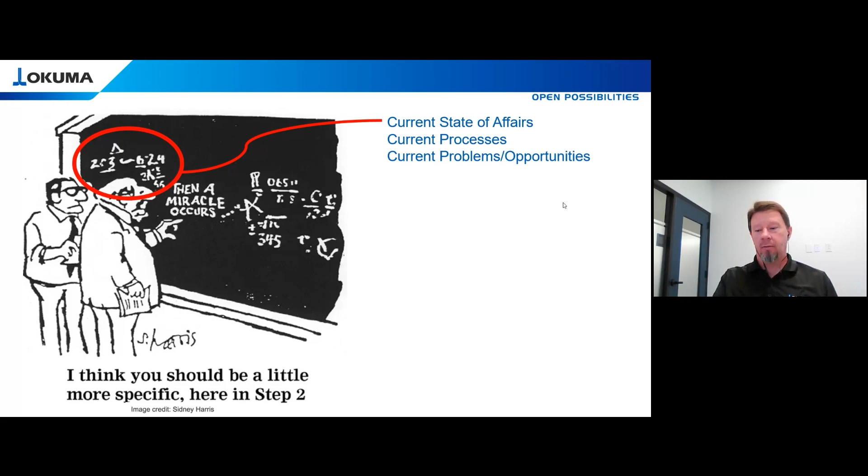You know, you've got the current position. You've got two guys sitting here at a board looking at a plan, looking at an equation, and you've got your current state of affairs. You've got where you currently are, what your current processes are, the problems, the opportunities, the things that you know currently. Then you have where you want to go. You've got your desired outcomes and where you want to take the company. And then you have that little middle piece, which is just, you need a miracle to happen. You need something to happen here in the center.

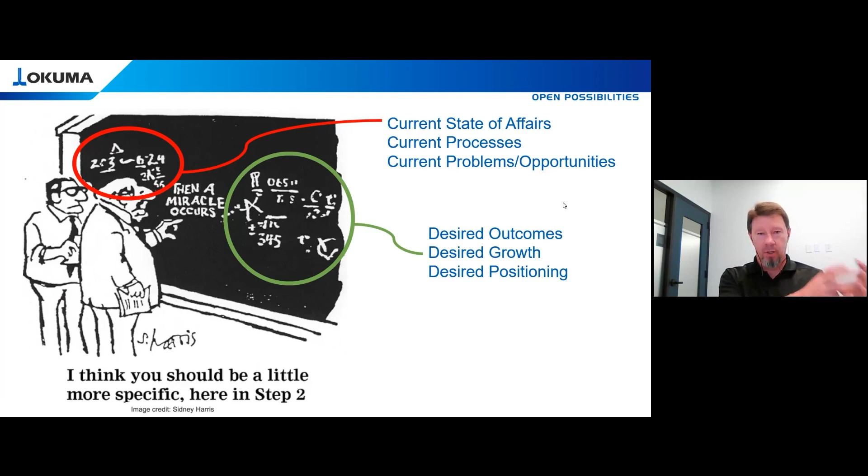So some of what I'm going to talk through today is really part of that middle piece. How do we help companies go from where they currently are, their current state of affairs, to where they want to go, dealing with some of the problems that they deal with on a day-to-day basis.

So two things that I know all companies have in common. I have the great fortune of working with companies globally, across the globe, and there's two threads that I always find in every conversation that everybody deals with. The first one is the actual product that companies sell. Every machine shop, you know, one shop might be an aerospace company cutting Inconel and titanium and hardened machine alloys. Another company's in medical and they're doing a different type of material. Then you get people that are into aluminum and structural and automotive, and everybody has their own niche in the marketplace. But the one thing that they're all actually selling is time. So time is what your product is, and the people who get the most out of their time wins in the end.

So the first thing is time. The second thing is challenges, right? Problems or opportunities. If you're a pragmatic person, a lot of the time you look at things in terms of problems that you're trying to solve.

You know, the real cheerful personality types talk about it in terms of opportunities. But at the end of the day, there's challenges you have to get through to move to that next step, to elevate your company to where you're trying to go. You've got that challenge you've got to overcome.

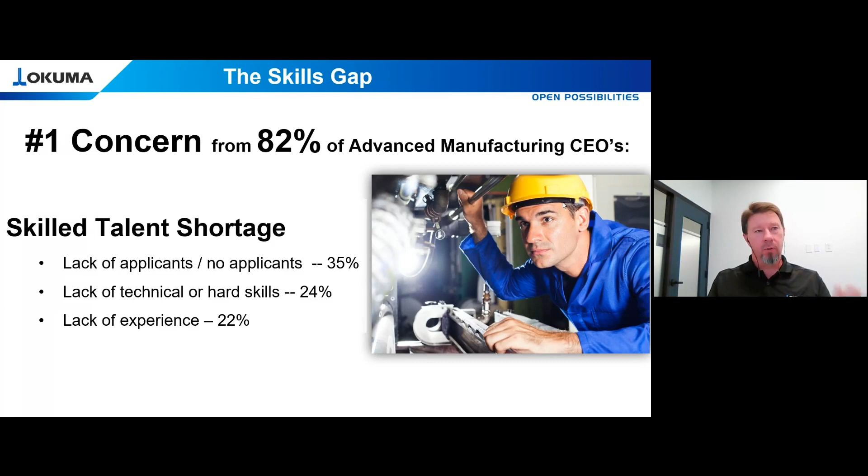So this entire workforce is aging, and we've got to build that bench strength of talent to backfill that. And then there's going to be menial tasks that people don't want to be involved in—that's an area where automation can really help bridge that gap.

When we look at automated cells, we've seen over and over where automation gives you the highest percentage of utilization, keeping that spindle running for more hours throughout the day.

Anybody out there that knows that machine knows it's very complex—basically 9 axes. It's like having 2 lathes with X, Y, and Z travel and a 5-axis mill all combined into one machine. It's a complicated machine.

They do small lot sizes, constant changeover, and yet when you look at that, it's the highest utilization in their shop. They're running 80% spindle utilization on that machine, and that is an automated cell.

That's a cell loaded with a robot system. It handles the changeover and things of that nature. And then as you start breaking down the rest of the shop, their numbers drop significantly.

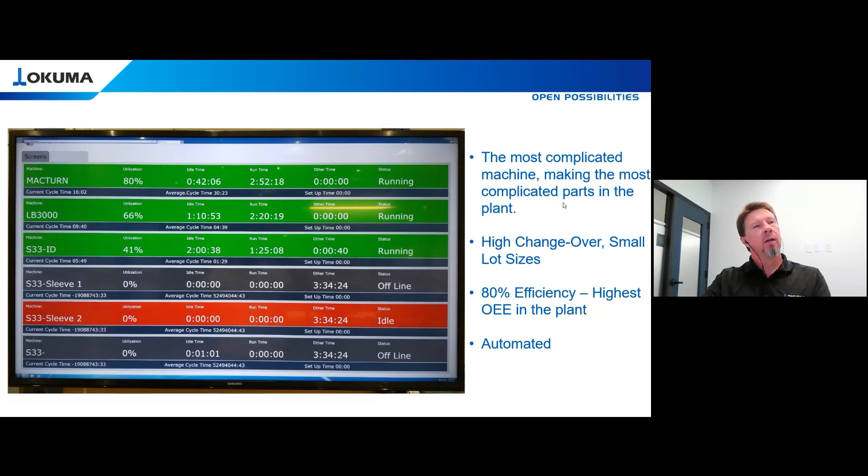This is a typical scenario we see over and over with machine shops—what they start with are manual operated cells. Even if they think they don't have the lot sizes to be able to automate, once they get into that arena, they realize their spindle utilization goes up dramatically.

Part of that is because when you look at some of these statistics, in a typical 8-hour shift, even if everything is running perfectly, on average 12% of an 8-hour shift that machine winds up sitting idle at some point.

So it's waiting on an operator—an operator's at break, or spread loading 3 or 4 machines, and he or she is in the middle of loading one machine when this one stops, and all of a sudden that stack light goes from green to yellow, and it's waiting on that operator. So having automation can help affect that dramatically right from the start.

Anytime you're trying to implement change or move in a different direction, you always get the yeah buts. Yeah, but I can't afford big systems like that. Yeah, but I don't have the manpower to do this type of work. I don't have the skill set to implement it. I don't have the budget to take on this type of automation.

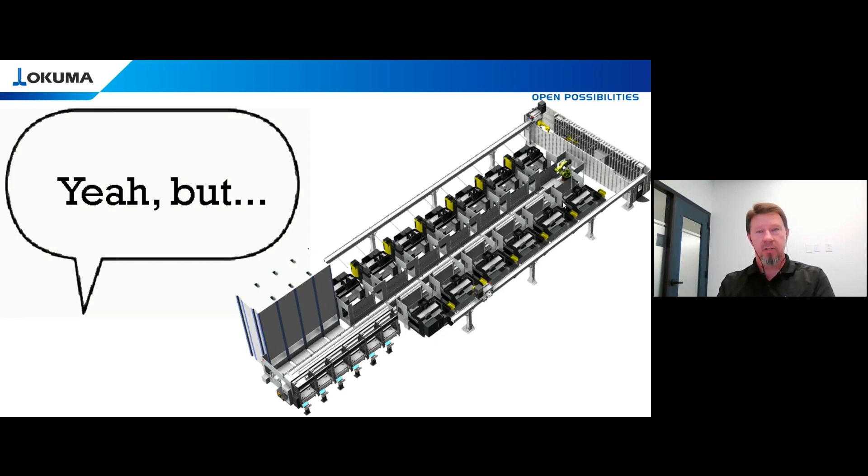The thing I want people to think about is that a lot of times when you think automation, a lot of the mindset in North America goes to these big integrated systems type cells. But we can help find a solution for the yeah buts by starting small. I'm a firm believer in anything you take on, you really need to do that crawl, walk, and run.

So many times we wind up with customers that have a project they want to automate, and instead of crawling and walking and then running, they want to go from zero to full out sprint. Then when they get the dollar amount or the complexity of a big cell, they lose interest in it. The fear sets in and they wind up walking away from it and going down the path they've always done, because change invites chaos. And it's something you have to be able to work your way through.

So starting small, starting with simple systems that are budget friendly, and then growing, helping a company fine tune their processes to be ready for bigger implementations, really is the right scenario.

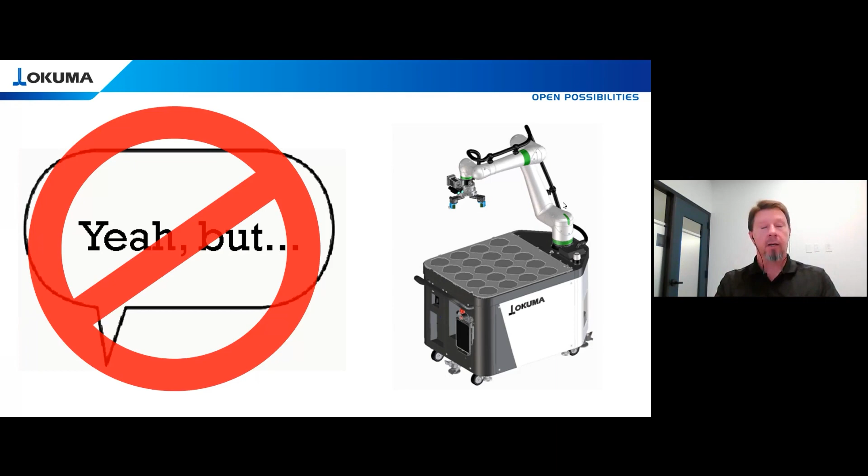So in today's presentation, I'm going to go through each segment of basically starting with something small, how that can be multiplied and then compounded into bigger, more complex systems. This is going to serve as the roadmap of some of the things I'll talk through today: the common types of machine tool tending, machine tool automation.

The first one that sometimes gets overlooked when we talk about automation is actual control. For us on the Okuma, we run an OSP control, our proprietary control. It doesn't matter what control system you're running, everybody's got their own different front end, but most controls on the background are either for us the OSP, or you've got a FANUC back end, or a Mitsubishi, or whatever. But you want to make sure you're working with a control that has the ability to have robust interfaces, and then system monitoring, which I'll talk more in depth about here in just a little bit.

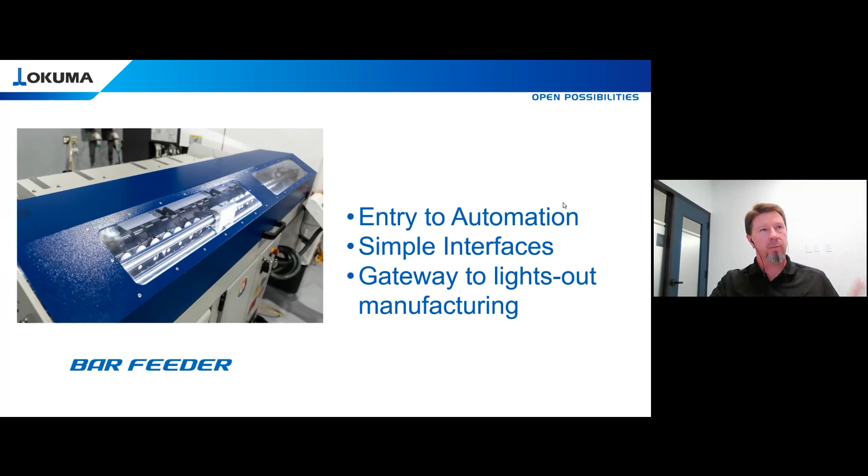Then we're going to talk a little bit about bar feeders and making sure we're getting the most out of bar feeders. That's really our entryway into automation. Almost every shop you walk into, they've got a bar feeder. They're already in this automation space, but are we getting the most out of it?

Then robotics. I would argue that as soon as you say machine tool tending or machine tool automation, this is where most people's mindset goes. Robots wind up being at the forefront of your thought process when you're talking about automation on machine tools. So I'm going to go through a couple of scenarios on, again, how do we start small and how can that go from the old cliche of think big, start small, scale quickly.

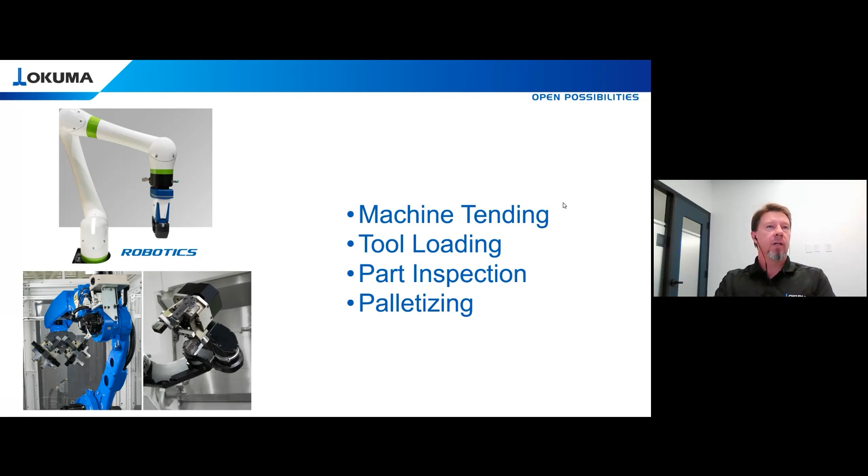Then gantries. I'm a big fan of gantry loaders. I want to talk through a little bit of that, where you use them, how you use them, implement them, that kind of thing. Pallet pools.

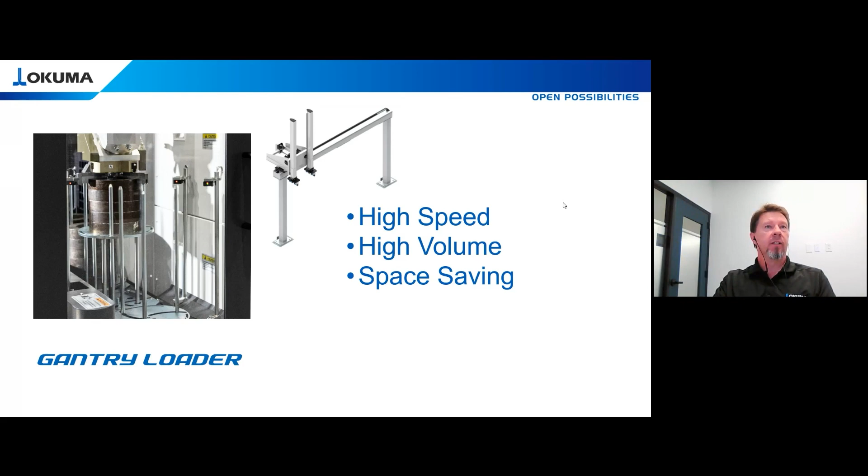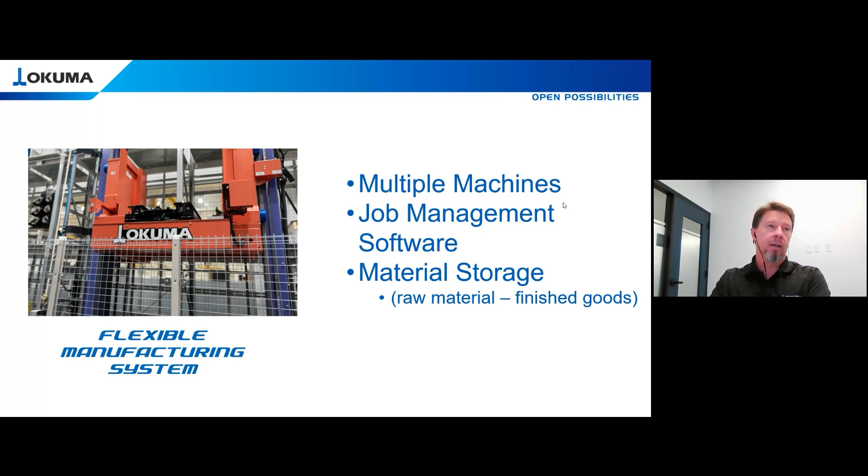How do we take machine tools from being a standalone machine, or maybe a two-pallet APC machine like most of your horizontals, some of your verticals have, then expand that capacity in a small amount of real estate. And then lastly, we'll touch on FMS systems and really going into big full-scale type automation with FMS systems, companies like Fastems and people like that.

So prior to automating, you have to have complete control of all your variables. This is one of the most important steps. I've talked about this a couple of times in different podcasts and things like that.

But if you rewind the clock to IMTS, about the 2016 timeframe at IMTS in Chicago, everybody was bringing robots to the show. Everybody was jumping into this automation bandwagon. And the main question everybody was after is, how do I get a robot connected to a machine? And how do I get it putting parts in a chuck or loading a table, that kind of thing?

And that's really the easy part. Putting a robot on a machine, that's the easy part of that equation. The hard part is, how do you get the utilization out of that cell that you're expecting? And a lot of that comes down to the variables.

So when you look at IMTS 2022, this past IMTS, almost every conversation I had circled around, okay, I've implemented a robot, but now how do I get this thing to run 24 hours a day, 7 days a week, the way that I thought I would when I first incorporated it?

So some of the requirements that you have to be able to automate a system really comes around a stable process. You cannot automate a bad process. Automation is going to help you make a lot of parts, and automation will make parts really good, or it can make parts really bad, or it can sit idle while you're waiting on something to get fixed or repaired. So you've got to have your process stable to begin with.

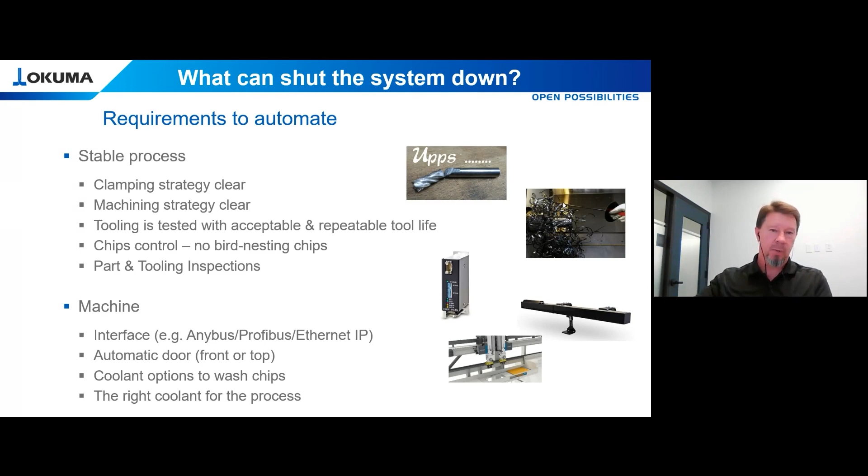I know of coolants, for example, if you're machining aluminum, you wind up with all the aluminum fines. There's coolant out there that's got certain properties that will help that sink, to help with the filtration process, things of that nature. Are you just using what's cheapest on the shelf, or using the right coolant for the right process? When I talk about coolant, a lot of times we want to look at what are the gotchas, what are the areas that could be easily overlooked that could wind up shutting down a cell, and again, not allow you to get the utilization that you're expecting.

So a lot of times you really want to look at your coolant system and actually fine tune that for your specific process. There might be coolant nozzles that are aiming in areas where chips are not hitting at all. Well, you can plug that coolant nozzle off and tap in and add another coolant nozzle in an area where you're seeing problems like this.

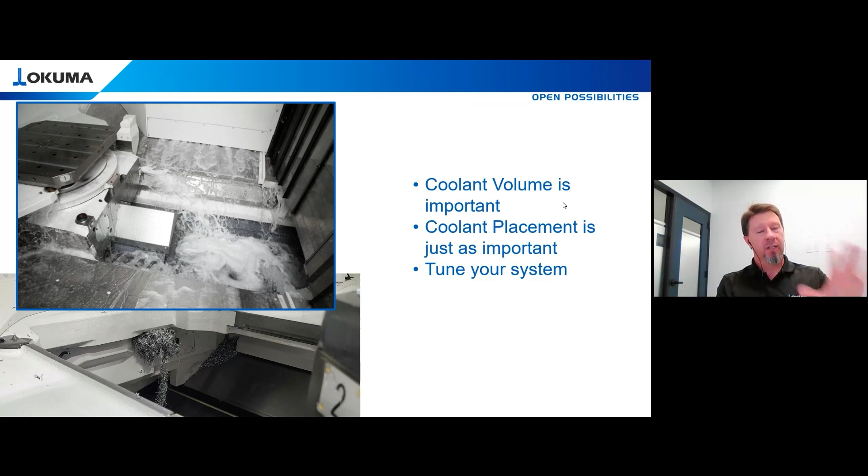Because if you allow chips to build up in areas like that, eventually that axis is going to come back, it's going to crunch some of those chips, it's going to get under a way cover, and that creates an opening. As soon as you get an opening, more and more, it's going to become a compound effect where all of a sudden you're going to wind up with a down machine because of something that could have been prevented early on with proper tuning of the process.

If you walk behind your machine tool and you look at your chip conveyor, and your coolant tank and chip conveyor looks like this, I promise you, you are not going to be happy with any type of automation that goes onto that machine. Things like this have to be solved before you start looking at implementing robotics or automation.

So in this particular example, this is a customer that's machining aluminum at high volumes, high rates of material removal. And a study was done. One of our partner companies, MP Systems, they specialize in high pressure coolant and coolant filtration, things of that nature. They actually sent in an engineer to watch a customer in a very similar scenario to this, to watch it run for days on end. And what they noticed was, first shift, the operator would come in. He's kind of the guru guy, the setup guy.

He would come in and top off all the levels—the way lube, the coolant—check the coolant concentration, get the water adjusted right, fill the tank, all that kind of thing.

And then as the machine is running, he's off and second shift starts coming in. The machine runs completely unattended. About halfway through second shift, the water starts to evaporate from heat and from boiling out during the machine process. The coolant concentration gets thicker, gets heavier, and before long it starts foaming.

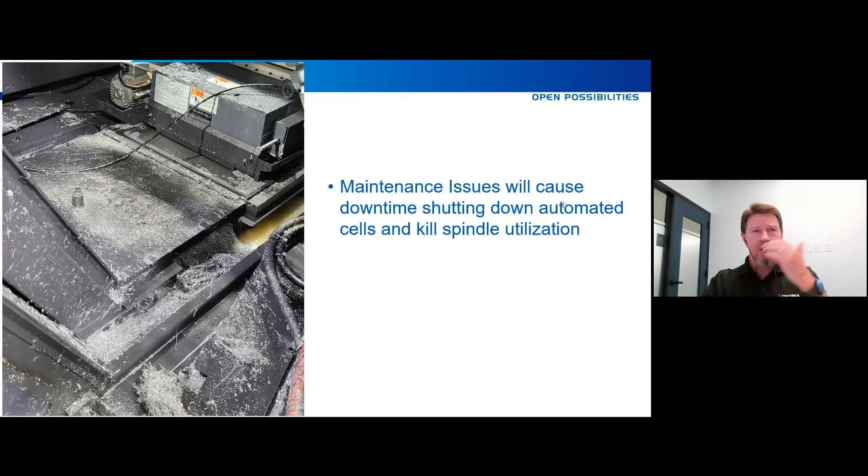But it's scenarios like this that need to be fixed before you start looking at implementing things. So when I talked about system monitoring, this is an area where we can put sensors around a lot of different areas of the machine.

Your specific needs might be a little bit different, but coolant concentration, coolant pressure, and flow—that's an easy one, that's low-hanging fruit. But you go all the way down to start thinking outside the box and looking at what shuts your machine down, and is there a way to solve that?

I'll give you another example we've witnessed, where a customer had most of today's modern spindles running an air oil mist lubrication system. It runs a specific type of oil that mixes with air and goes into the bearings of the spindle. They had a situation where the wrong type of oil, like a way lube oil or something like that, got mistakenly put into the spindle lubrication system.

Well, the two oils reacted with each other and it congealed. So all of a sudden the spindle wasn't getting the air oil mist lubrication it needed, and it eventually shut the machine down. There's ways we can solve that, from simple color coding to barcode scanning to even going as far as having RFID type chips. There's ways you can look at, okay, what was the problem, and then how do we solve that problem?

So these are things we want to be thinking about—again, how do we control that entire process. Anytime you have a scenario where an operator has been used regularly to allow parts to load, for an example, I go back to when I was a machinist right out of high school.

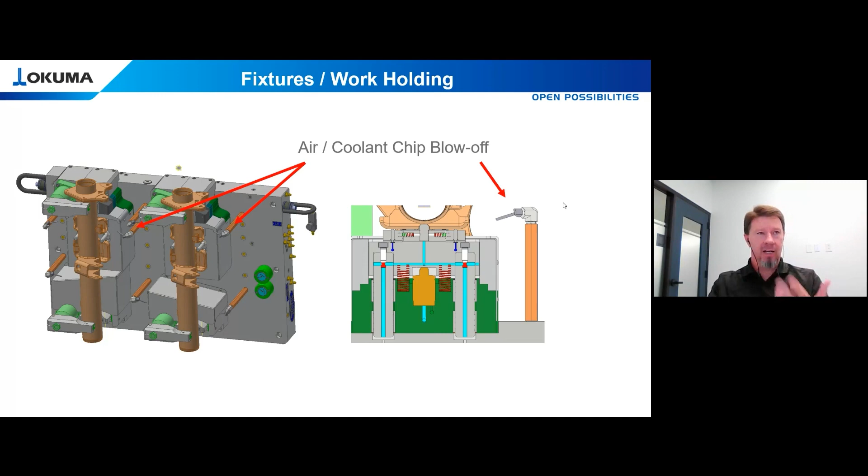If you're going to automate that, that type of stuff can't be there. So you've got to think in terms of: can I build that into my work holding or into my fixtures, where I have coolant or chip air blow to make sure all of my seating surfaces are clean when that part is presented. That's part of the strategy that needs to go into your fixtures and work holding.

If you're using types of machines like a horizontal, for an example, where you're loading parts and now gravity isn't working in your favor, think about strategies like having spring retentions so the robot is kind of snapping the part into place with a spring retention, and allow the robot to get out of the way while the hydraulic hands come in to clamp the part. Those are some of the considerations you want to be thinking about in terms of the work holding strategy.

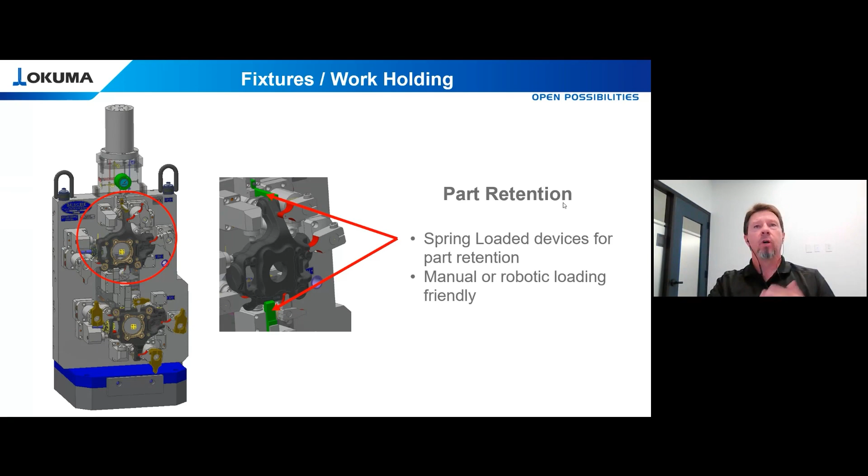There's times when a conventional process, depending on your part volume, with multiple machines is going to create parts faster. But then there's other times you could look at a multifunction machine. For our case, that would be a MULTUS machine, or perhaps a 5-axis machine with turning capabilities, where that's going to be a better process.

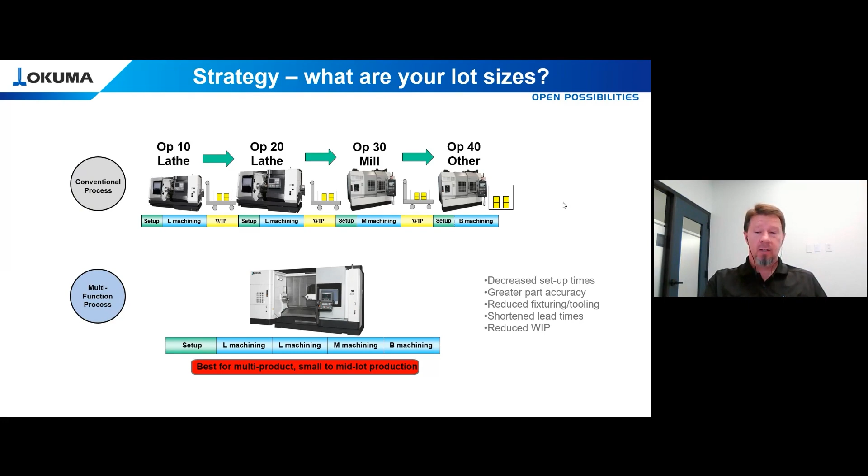A lot of times there's simple math that can help you decide which process to go down. Do I want to do 2 lathes and a machining center, or do I want to go to a multifunction type scenario? Obviously your times are going to be different, but you need to look at your setup time compared to the takt time for your parts.

At the end of the day, your setup time over run time gives you your break-even point. So in this given scenario, your numbers will be different, but just for example, if I'm running 41 parts or more, my conventional process is going to be the fastest way to machine parts. But if I'm doing below 40 parts, lot sizes of 10 or 20, now a multifunction machine is going to be the fastest way to make parts because of the changeover time involved.

So those are things you want to look at to decide what your strategy is going to be, because once you dictate how your part flow looks, that's going to lead us towards: are we robot loading, are we gantry loading, are we looking at FMS systems, things of that nature?

So start small, start simple. I want to go through simple automation and then work our way up. Hopefully everybody's familiar with the KISS principle - keep it simple, as my wife likes to say, keep it simple, sweetie. That's something I always look at when we start looking at processes - how do we start simple and then expand and grow on that?

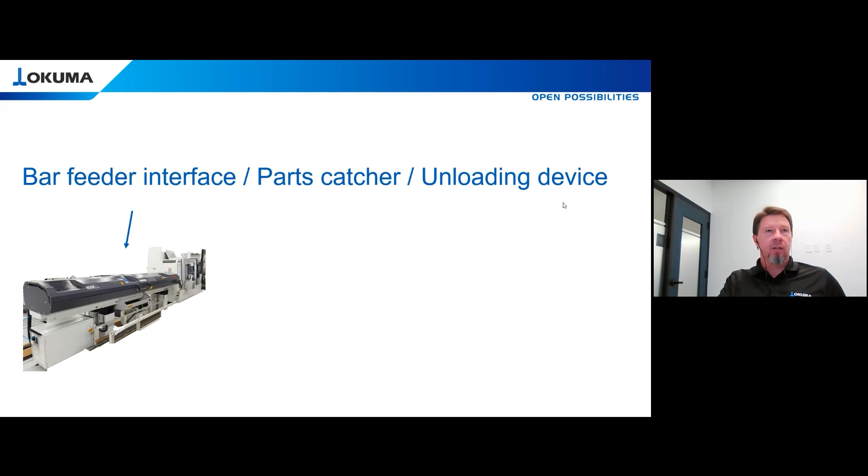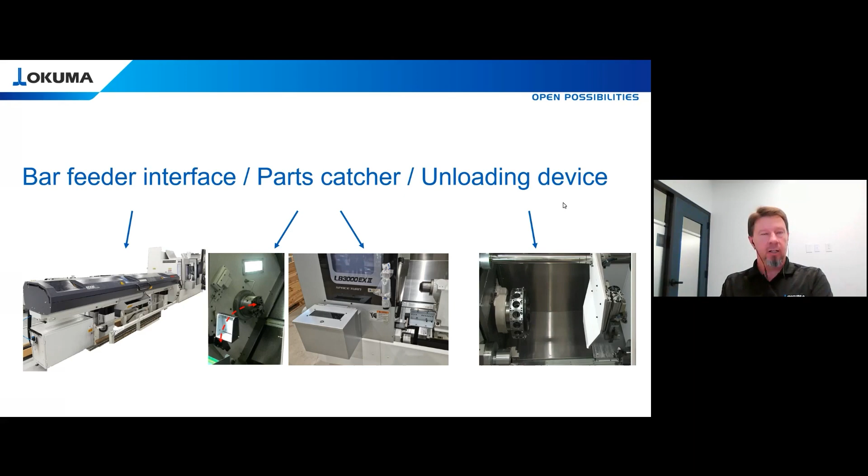So bar feeders, parts catchers, unloading devices - that's really your entry level platform. We can take a bar feeder and put it on a machine. When you're looking at the machine tool side, you need a parts catcher to extrapolate the parts that you're bar feeding in, or some type of unloader device.

But the thing I want to challenge people to look at is, are you getting the most out of your bar feeder, out of the process you're using? Are you getting the most out of that? Where I come from on that is, a lot of times we look at the amount of changeovers people are doing, the amount of time it takes to do a changeover, and the manpower and dollar amount put into it from human resources.

If we can look at bar feeders and the spindle diameter, and maximize the size of our bar, then get the most amount of parts out of that same diameter - so we use a common diameter, common part size, and get the most parts out of that. And then, are we automating the unloading side of it?

In this scenario, you can see there's a bar feeder coming in on the main spindle, and then you have an extractor pulling parts out of the sub spindle. Look at scenarios like that - are there things we can do to get parts out? Again, taking that human resource, the labor component, out of the part manufacturing side.

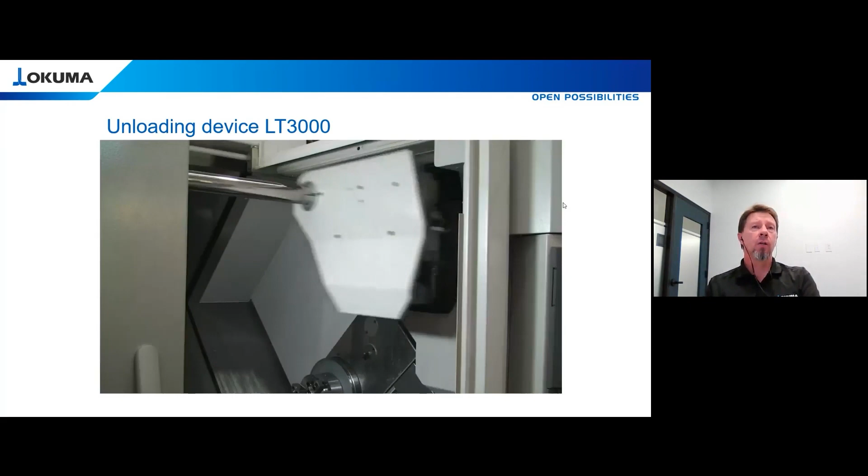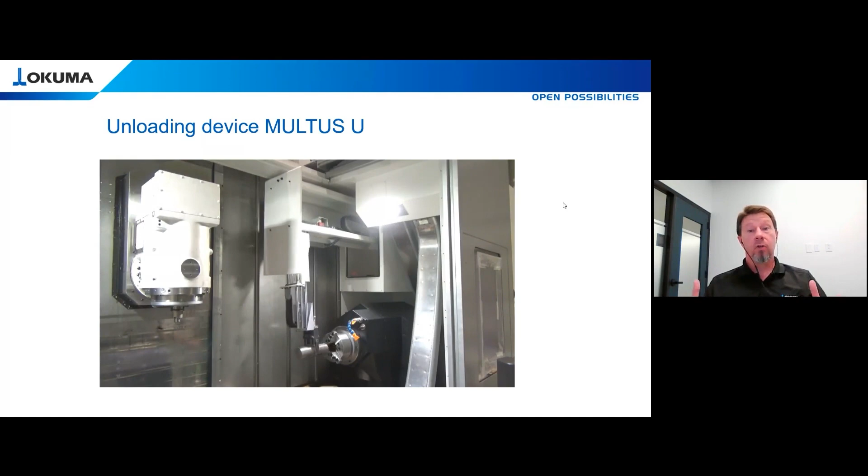Unloader devices is something we do a lot on, primarily our high volume machines like the LT, where we've got multiple turrets, multiple spindles, or our multifunction machines. A lot of times these are used for parts that are a little too heavy or too big to go into a normal parts catcher. So we've got unloading devices we can look at - again, this is kitted and integrated from the OEM machine tool builder, easy to implement, easy to integrate.

Then from here, we step into our pre-engineered robotic systems - pre-engineered robot loaders. Really, where's the starting point for robotic systems? A couple of scenarios I'm going to talk through between industrial robots and collaborative robots.

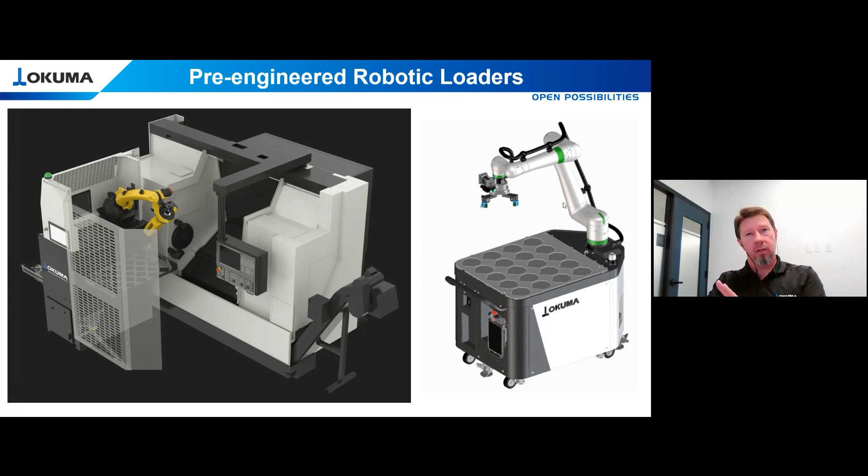So for us, we have a system called load and go, or an Okuma robot loader. This is a kitted, pre-engineered cell that comes in. We've got a couple of different scenarios. What I have pictured here is a drawer system. Most of the companies in this space building pre-engineered robots have a shelf or drawer system of some configuration.

In this example, you can see the robot is pulling from the machine tool side. It opens the drawer, pulls the parts, loads and unloads the machine from that side. The operator would be on the back side of the cell putting in raw material. You could take that a step further and have a collaborative robot loading parts from a bin into the drawers.

But these systems use an area scanner, so it simplifies the guarding. These pre-engineered systems come in with all the guarding needed to meet safety requirements. The area sensor puts a perimeter around it, so as you walk into that machine and get to a certain range, the robot slows down. If you get too close, it triggers and stops the robot altogether until the operator gets out of the cell and restarts it.

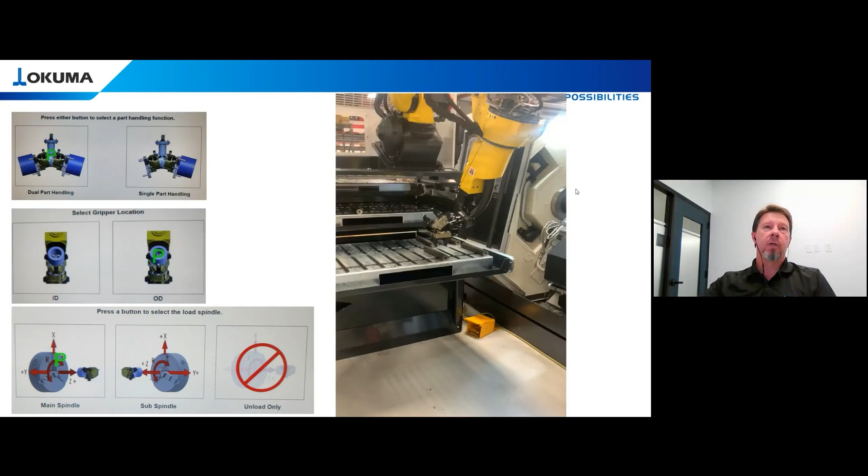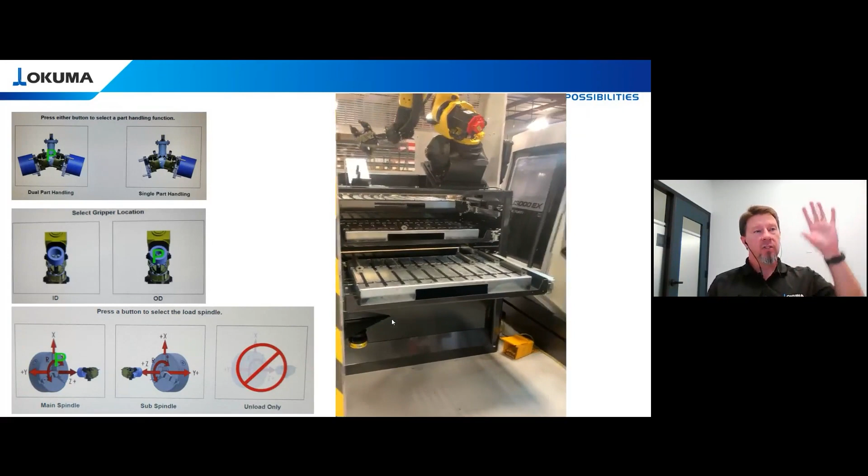So these are great systems. Again, they come in pre-engineered. All of the motion is pre-taught, so you don't need a robot programmer on staff to implement these. The software to program and load them is very simplified. It's a conversational type window that just asks a series of questions.

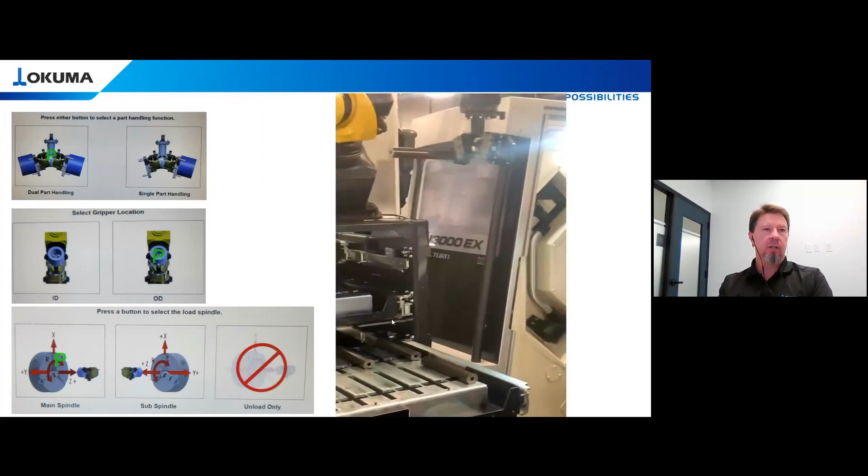Are you grabbing the part by the ID? Or are you grabbing the part by the OD? Are you grabbing two parts at once or only one? It just steps you through a simple, user-friendly graphical interface so you don't need somebody with a specialized robotic skill to put these in the manufacturing environment and get them implemented and up and running quickly.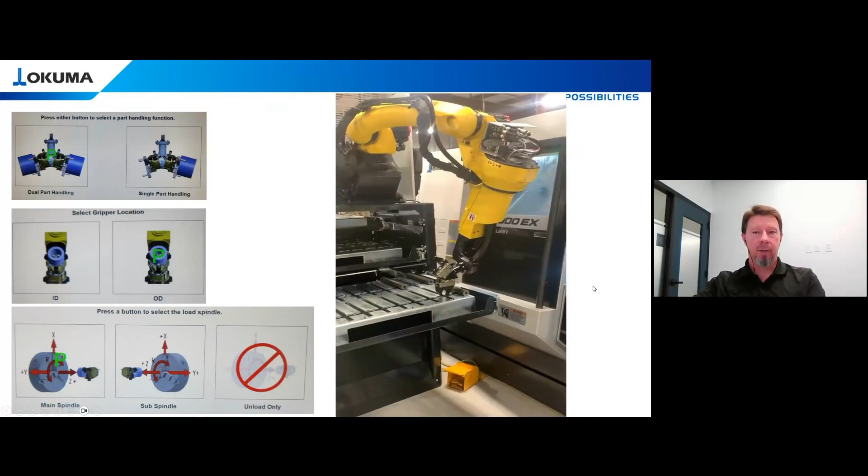From here, we step into the collaborative space. This is an area we see growing quite a bit. There's a lot of interest in this, primarily from people who have that do-it-yourself desire—people who want to bring them in, implement it themselves, or have a simplified unit that doesn't have guarding. In this scenario pictured here, we produce a collaborative robot cart, meant to be redeployed to different machines.

So it runs a simplified robotic interface, and it needs a power drop—you can unplug the system, roll it from one machine down to another. This is a Fanuc CRX collaborative robot. It has a great little 2D vision system that looks at, I'll call it, a QR code—really a grid pattern that you put on the door or side of the machine. When you bring that up, it takes a picture to recalibrate itself to where your machine center lines are.

So we can load up multiple machines in the software to make it simple to move the cart from one machine to the next and re-implement it. If you have a job you need to run overnight on one machine, and the next day you've got a different job to run overnight, you could actually move that system and re-implement it.

Most of these collaborative type robots—something common you'll see throughout that space—is they all run a very simplified programming system, more modern than what we're used to versus the conventional days of doing all the teach points. So this is drag and drop type icons. From the Okuma standpoint, we have a user-friendly interface, more of that conversational type window you saw on the previous industrial robot pre-kitted cell.

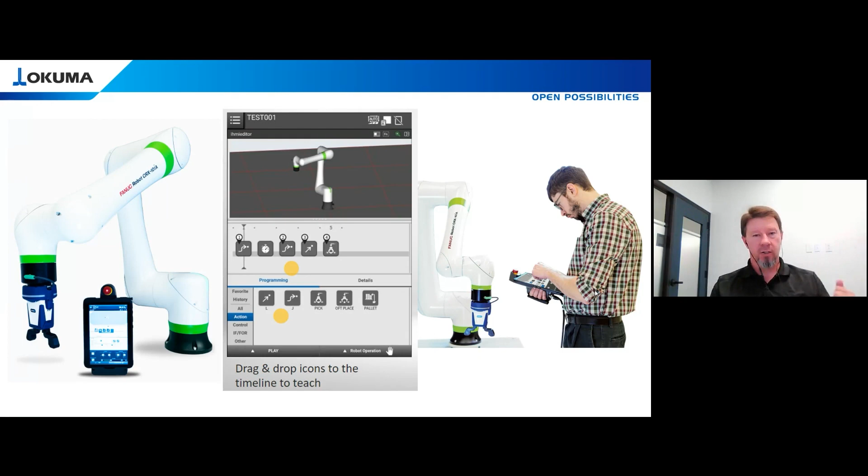I want to touch on our Armroid and Standroid. These are integrated robots that come as part of the machine tool from the OEM. What you'll notice on the picture on the left is what we call our Armroid. This is an Okuma built robot that is mounted above the headstock of a lathe. What's different is that robot actually lives inside the enclosure in the work environment of the machine, and it gives us added value from the machining process itself.

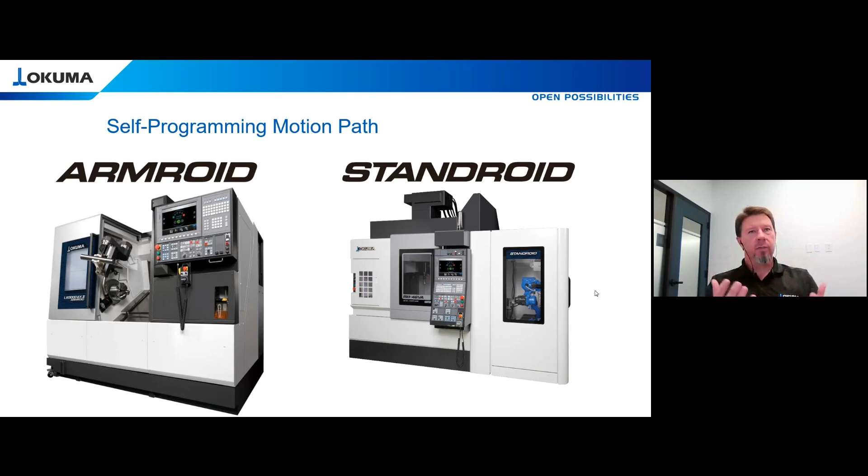Where the Standroid, that is a traditional Yaskawa robot. You can see the blue robot through the window. That's a traditional robot, but it's running a different type of software that is integrated into our machine control, and it comes completely kitted from Okuma.

It uses a conversational type dialogue screen where you're telling the robot where you want to grab the part. If you've got a part that's got a flange on one end or something where your weight's going to be off, you tell it where on the part you want to grab. You give it some basic parameters, and then it looks at our collision avoidance software and determines its own motion path to take the part from outside to inside the work environment.

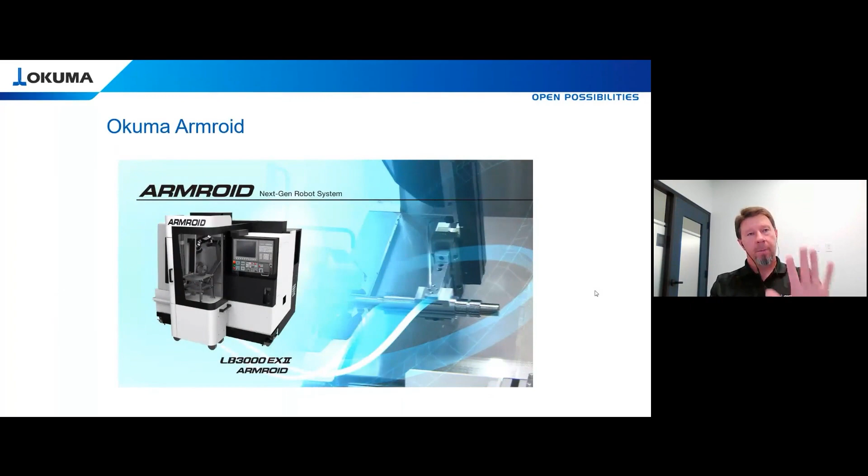This helps in a couple of scenarios. It'll help highlight collision areas that you may or may not see when you're initially setting it up, and it takes the need of having a robot programmer on staff out of the equation. These come in completely kitted up with simple software that anybody can use.

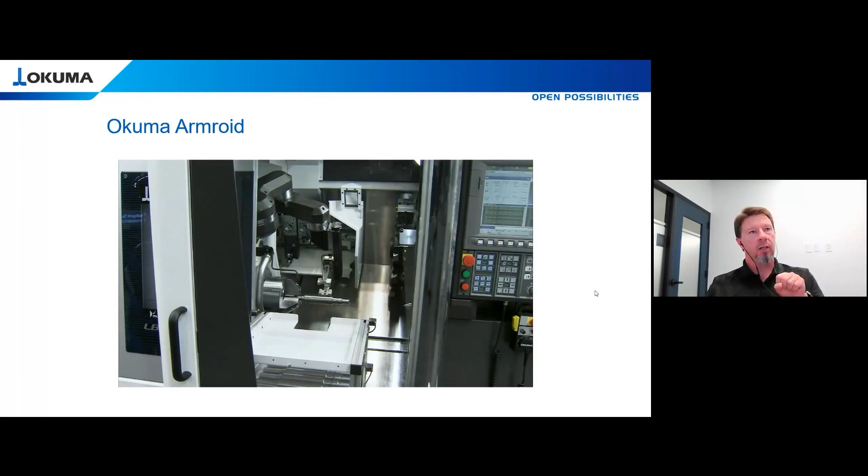Here you can see this is an Armroid, and you can see how it reaches outside the machine and pulls the parts into the machine. The drawer up at the top has three different end effectors that can be utilized, and it'll change out the different end effectors depending on the type of work being done.

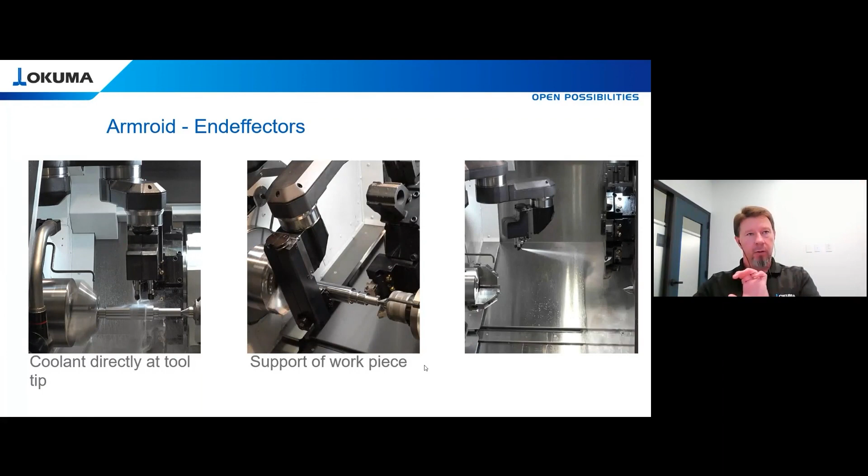A couple of end effectors it comes with, obviously, is the part loading gripper hand to get the parts in and out. It has a work support that can be used basically as a follower steady rest. It's really a damping tool if you're doing shaft work, things of that nature.

And then a coolant nozzle, which can be incorporated into the gripping hand itself. The neat thing is it can follow the cut while the cut is taking place to help from a chip management standpoint, or it can be used to actually clean the machine and hit some of those trouble areas inside the machine enclosure that maybe your shower coolant isn't hitting. It gives you added value to the system that you can't do with a robot sitting outside of the machine tool.

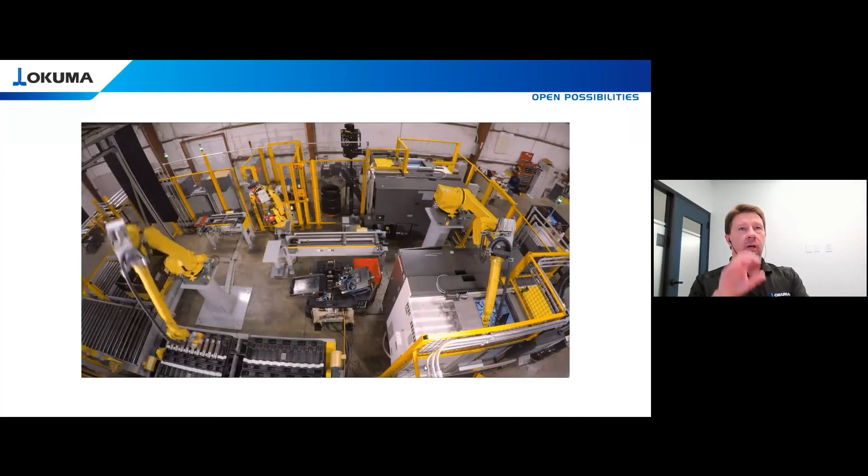From there, we look at going from the small pre-engineered type stuff. You can take that same philosophy and grow it into your full-blown custom automation. This is a scenario where you can see one robot loading two machines, but there are multiple other robots doing other value-added features to that process.

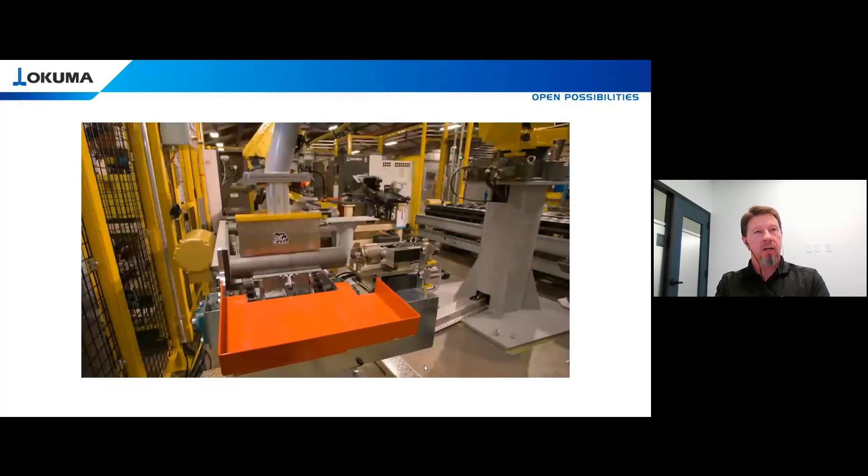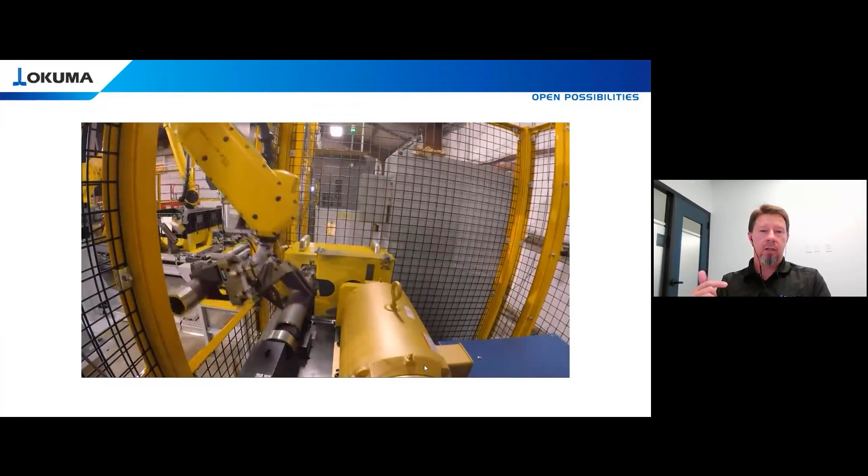The thing I find very interesting about this setup, done by Gosiger Automation, our sole robotic integrator, is they've taken a part that is very, very simple - just a tube that has an OD being cut - but they've automated all of the non-value added steps to that manufacturing process. All the pre-work, getting the part ready to go into the machine, all the way down to the inspection, the measuring, and the palletizing, is all done through automation.

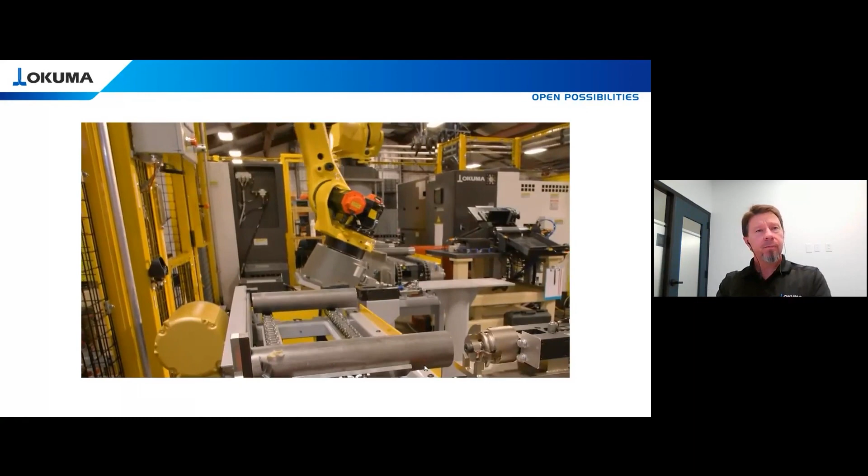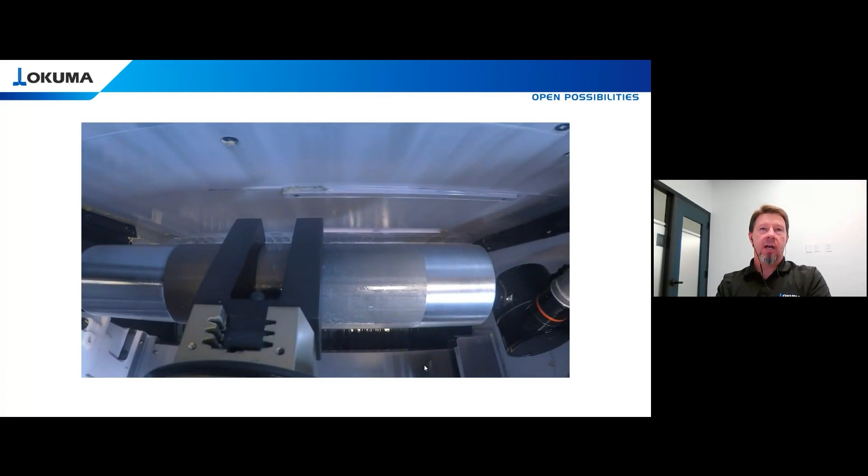One of the things I really like that they've done in this cell, which we try to leverage a lot when looking at automation, is loading through the top of the machine. You notice the machine front and back, and the robot is sitting over the top. It's got what we call a moon roof on top of the machine where the robot comes down. The advantage is it allows that whole front of the machine tool to be open to the operator.

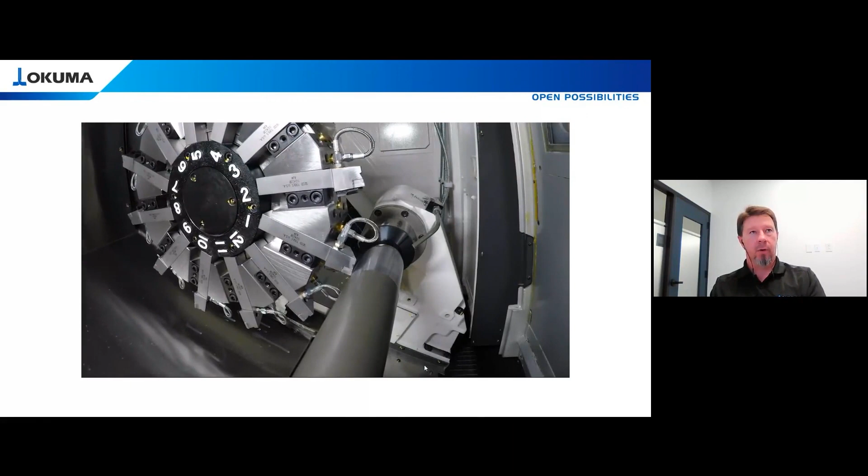They've got access at any time they want to come up, look at the control, or when it comes time to change tools out. In this scenario, this is such a simple cut. They're only using one insert to make the entire part, and they're using a 12-station turret, so they've got 12 redundant tools they can pull into the mix at any given time. A really creative way of using automation for a simple part, but getting a lot of added value out of that.

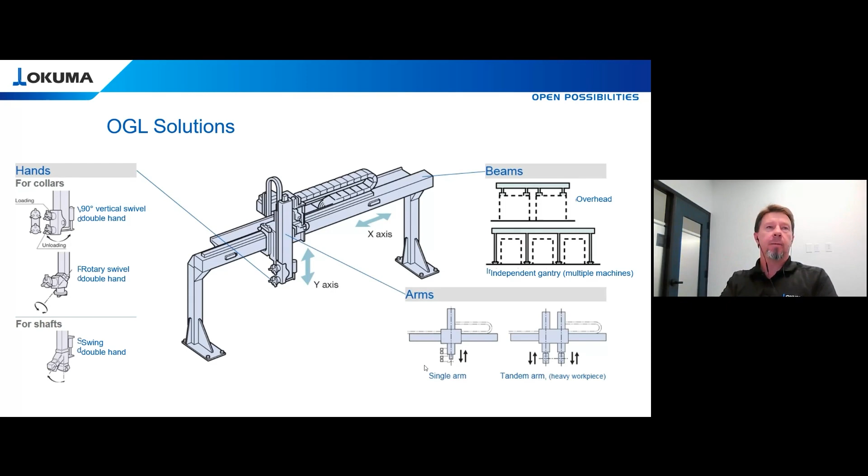From here, let's talk more about high speed and high volume applications. This is where we see our gantry loaders really come into play primarily. Gantries are 2 to 3 axis linear motion type robotic systems where we are loading parts from a stocker table into the machine and then going to outbound processes. These gantries can be configured to do shaft work or chucker work, depending on the type of work you're doing. We have a series of machines that come with the gantry loader integrated as part of the machine tool, or we can have them as standalone systems, shown here with their own feet, so machines can be placed underneath and field retrofitted. Depending on your needs, there's different ways we can approach it.

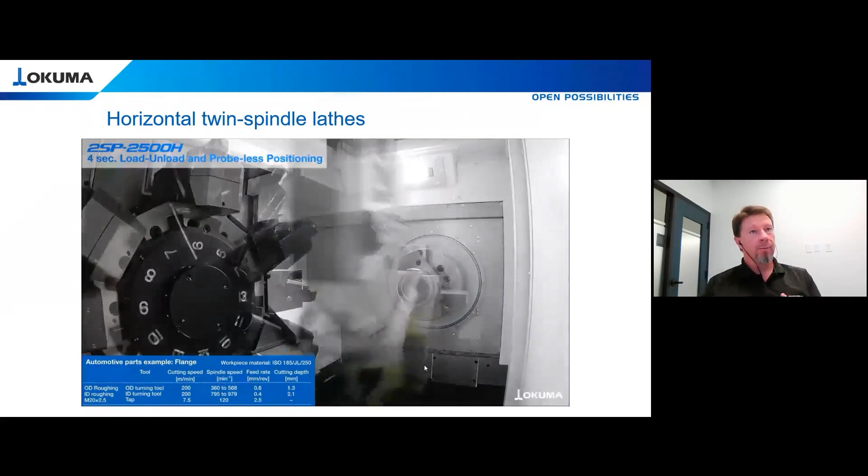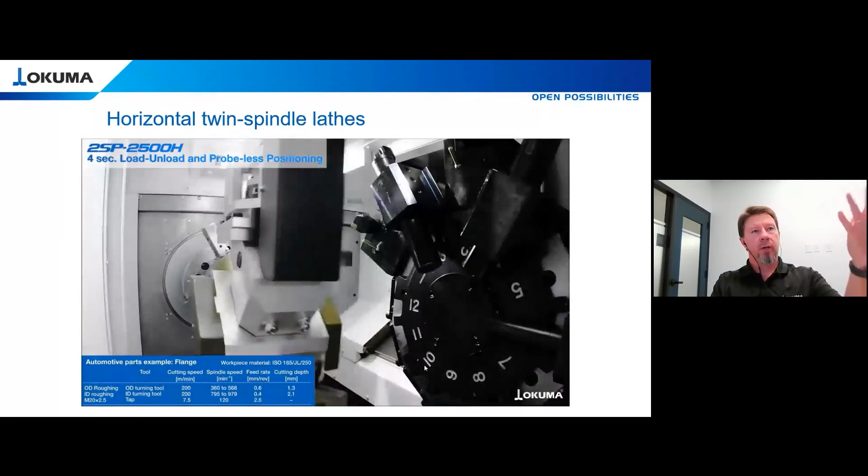One of the key features about gantries you'll notice is just the speed. I love this video to show the speed of loading and unloading parts, getting them down to other downstream processes very quickly. In this scenario, you can see it did an Op10, putting it up in a turnover station where it's flipping the part over for the Op20 presentation, and then from Op20, it'll take it and put it on an outbound conveyor.

Here it's doing a part inspection, getting 100% post-process gauging on every part. And that can be expanded on depending on what your needs are.

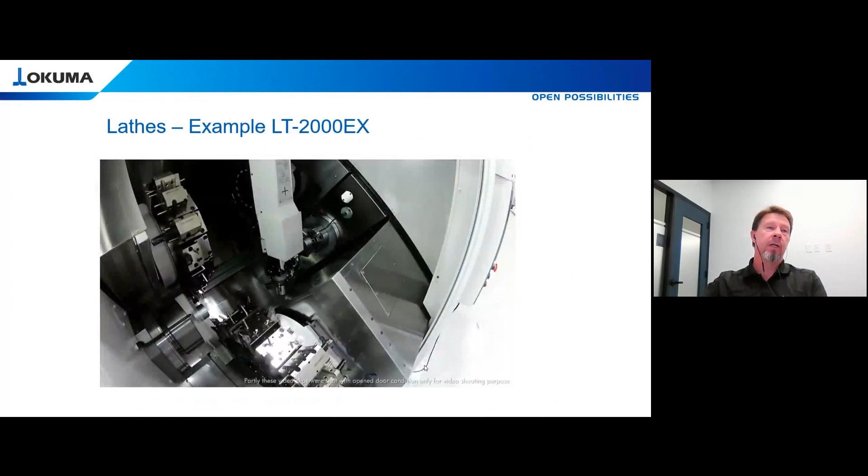This is a version to show you a little different style of machine. This is one of our LTs - you can see it's got 3 turrets, 2 spindles. So it's doing an Op10 load, picking off to do the Op20 operation. While the cut is taking place, that gantry can come in and load Op10, again really maximizing your spindle utilization out of that machine.

We have several different stocker table configurations that are standard. We also work with third-party companies who build custom stockers or pitch feed conveyors for shaft work, things of that nature. These come in different standard configurations, but they can also be customized depending on your individual needs.

Just to give an idea of what can be done with a gantry outside of just the machine tending side - so much of what we talk about, we think about things in certain windows, and we think of the gantries loading and unloading parts, but we can incorporate blow off stations, part inspection, gauging, things of that nature. So that beam could be expanded and other types of downstream operations can be done, adding more value to that automation system.

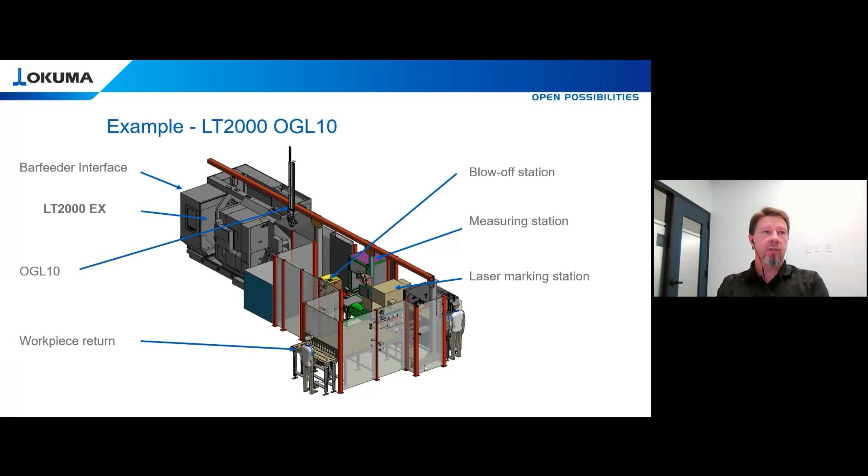We want to think about how you can combine different types of automation together to get the most out of it. Here's a scenario where we have an edge bar feeder feeding one of our LT style machines, or actually I think it's a Multus machine, with an edge bar feeder feeding it. And then there's a gantry overhead - this gantry is picking a shaft part up after the machining process and then sending it down through an outbound conveyance system to other downstream processes.

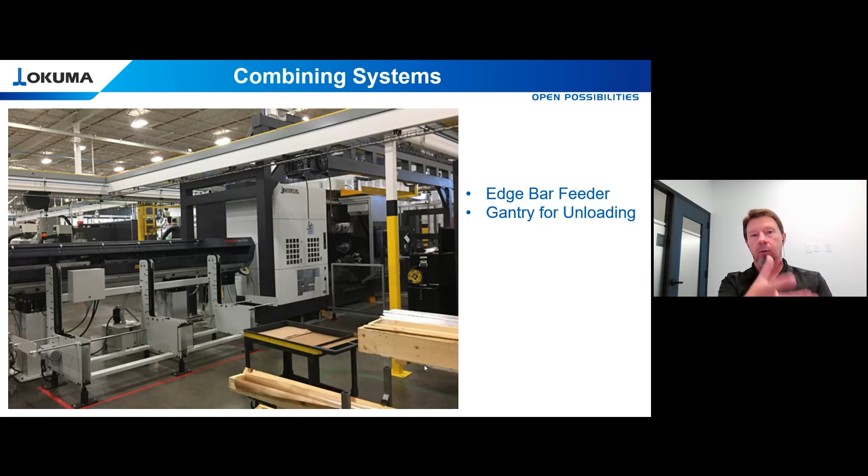So here you're combining bar feeding automation with gantry automation. Now, if you're doing chucker work, that could easily be a load and go system, unloading parts into a drawer cell and using it as an unloader versus a loader, things of that nature. Depending on your specific needs, there's a lot of opportunities we can look at - how do we combine multiple levels of automation to get the final product you're looking for?

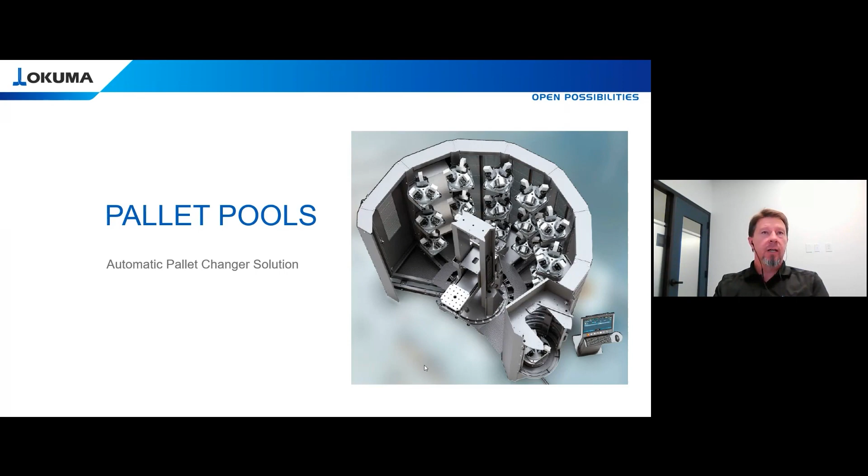I'll move from the turning operations into the machining center side and talk a little bit about pallet pools. I'm a huge fan of horizontal machining centers - I've talked about that for years. When I first started out machining, the very first machine I ever ran from a machining center standpoint was a horizontal. So my brain, when I look at parts, a lot of times I automatically think in terms of horizontals, because I'm looking at how I'm stacking parts up, working my way around tombstones, things of that nature. Horizontals are great for automation because they have 2 APC already built into it.

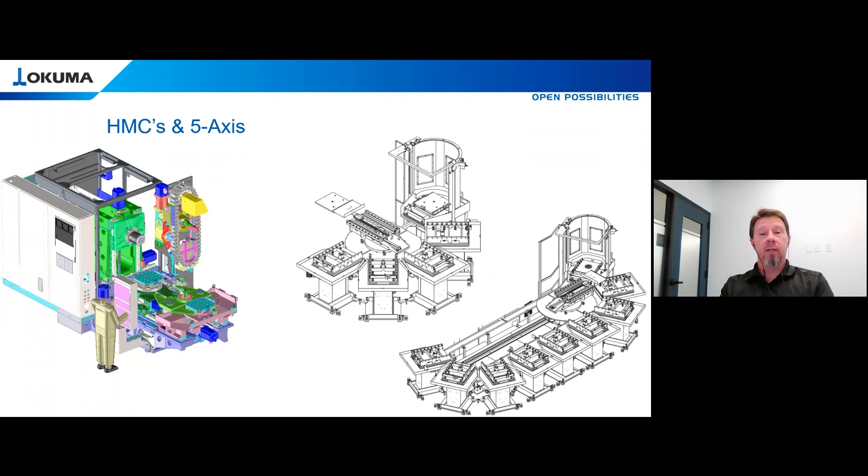So you have some automation already built into the platform. And then by adding a pallet pool system, we can expand that from a 2 APC to a 6, 10, or a 12 APC very easily. And these can be field retrofitted.

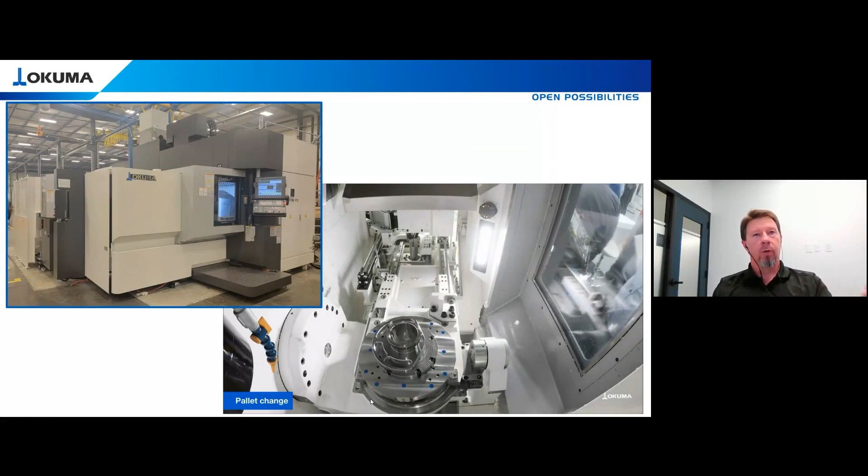So it's a great way to take a standalone machine and add automation to it. Our 5-axis machines, the machine you see in the top left picture, that's a 5-axis machine that was a standalone machining center. The way our trunnions are configured, they turn to and from, in this scenario, basically to and from the operator, so we can load the pallet pool in the back of the machine. So the operator still has complete full access to the front of the machine to check tools, look at the control, whatever. He's got full access to the front of the machine.

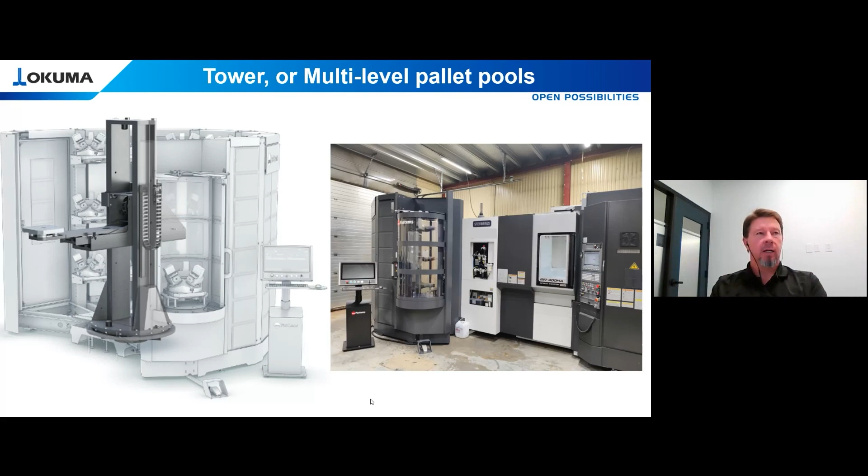So it's a beautiful way of automating 5-axis machines. And then to step that up a level, we go from a single level pallet pool system, which is very budget friendly, to a tower or multi-level type pallet system. Here we typically see 12, 18, or 24 pallets added to the system, depending on the machine and configuration. In a horizontal machining center, the tower type system sits to the front of the machine, just as the single level system would. In this scenario, it's the same type of operation, only you have an elevator to pick up pallets off multiple levels.

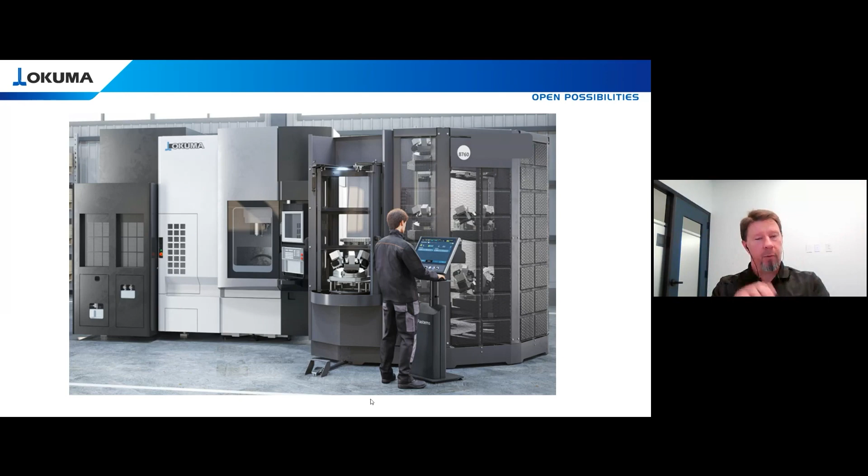And this can also be incorporated into our 5-axis machines. Again, the trunnion is configured in a way that makes side loading very nice, to feed into the side of the machine. I love this picture because it shows a lot of density in your manufacturing process. This is showing an 18 pallet system, but using pyramid fixtures where you're getting 3 to 4 parts per pallet. So the number of parts you're putting into the system goes through the roof at that point.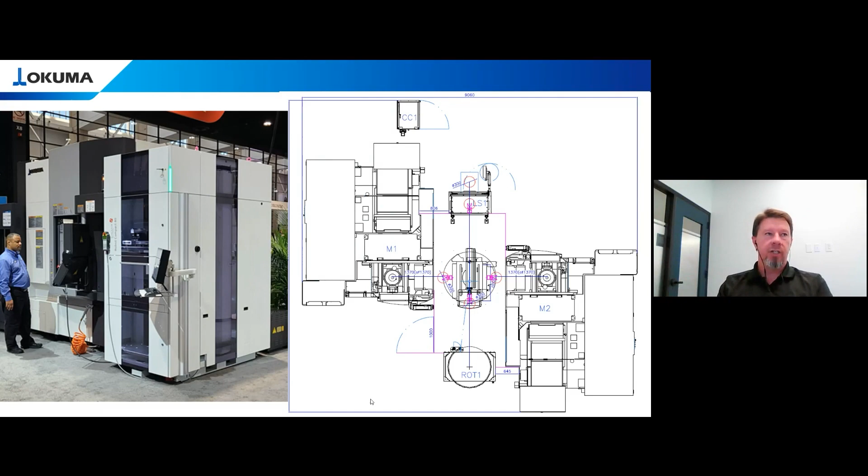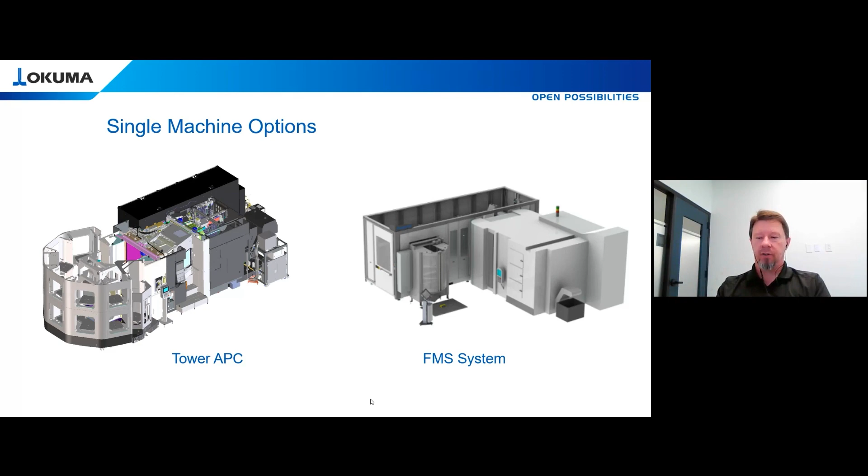So as we look at single machine options, there are a couple of different configurations. Obviously the tower type pallet pool system we talked about. Then you jump into what's known as an FMS system, or flexible manufacturing system. A container system is one machine and one container of pallets, usually ranging from 10 to 12 pallets depending on configuration. But then you can expand these container systems up to 3 times to get 3 machines and one loading system out of it, increasing your spindle utilization by getting more machines onto one type of system.

And then as you start small and expand, depending on your processes, these systems can be very large, very extravagant. We work with a company called Fastems, really big in this FMS type space. They make an FMS system that's completely modular, that can grow depending on the size of your shop, and continue to add machines to it. I recently had the opportunity to go to Germany and visit a customer with 2 plants and a gangway over the top, and the entire plant is run off FMS systems with a central tool storage, which has all the tools for their entire manufacturing plant.

And then they had a robot on a rail that went in between the two plants that would take tools from one central storage and then park it in a staging area to feed the other manufacturing plant. And the beauty of that is it made him rethink the size of tool changers.

For years, it was always known that if you're going to do automation, you want to buy the biggest tool changer that you could put on a machining center. Well, having a central tool storage makes you rethink that, because now I can get away with smaller real estate, a less expensive machine with a smaller tool changer, and let that central tool storage center be my hive where all my tools go in that I'm feeding my manufacturing plant with. So again, it kind of causes you to think a little bit differently on what can we do to maximize our manufacturing space.

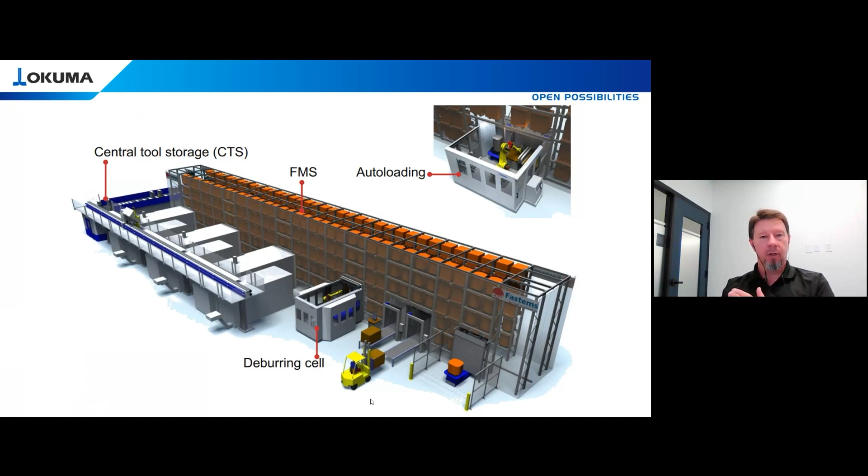And then other processes could be added to a system like this. Here you can see in the picture a deburring cell. You could have wash stations, something kind of going, again, a little bit outside of the box from, I think, what most people think about is not just machining centers.

We can have an FMS system, and instead of having a row of horizontals or 5-axis machines tied to it, we could have a robot cell tied to that, where your FMS system is actually feeding parts that the robot is taking and then feeding one or two lathes into a system. So it really opens up the level of creativity that you can get, depending, again, what your needs are, what you're trying to accomplish. So systems like this, you could get really creative in having an FMS system load from one end, have finished parts going back into the FMS system.

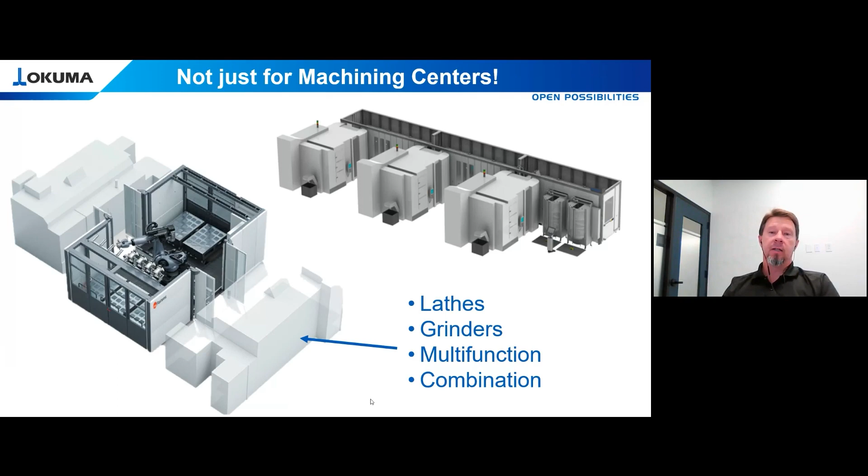Or if something, the FMS is down or something happened, you could still bring carts in manually into the other side and keep that cell up and running. And again, really maximizing your usage of the type of work you're doing. Combining other types of automation, that could also be a bar feed application on one machine where you're unloading parts and then sending that into the FMS for part storage and things of that nature.

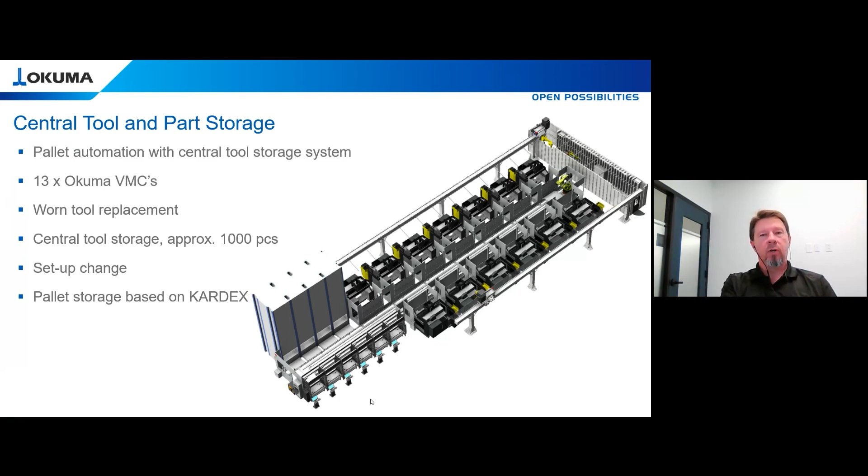So this is just to kind of go back full circle to one of my opening slides on the type of automation that can be done, starting really small and then going really big. So if you're a company that's already in that walk or run phase and thinking, what's the next level? We can tie in Kardex systems, central tool storage, multiple machines. This is a representation of 13 of our vertical machining centers, all tied together with a central tool storage system and a Kardex system where all the parts are stored. So it's really thinking about where are you currently and where are you trying to go, and what tools can we put in place to get you there.

But don't let that be an excuse. Don't say, I can't afford it, we don't have people to implement it. Having a whiteboard and a Sharpie marker will get the ball rolling on capturing the data on what you need to do to move your shop to the next level. And then you prioritize what your needs are for your individual shop. You don't want to come up with a list of 80 things and then try to attack all 80 of them. Come up with your list of 50, 80, whatever that number comes out to be, and then pick the top three. Pick the top three that's going to move the needle. Put all your focus and energy on executing to solve those two or three items, then celebrate those wins, motivate your team to move on to the next level.

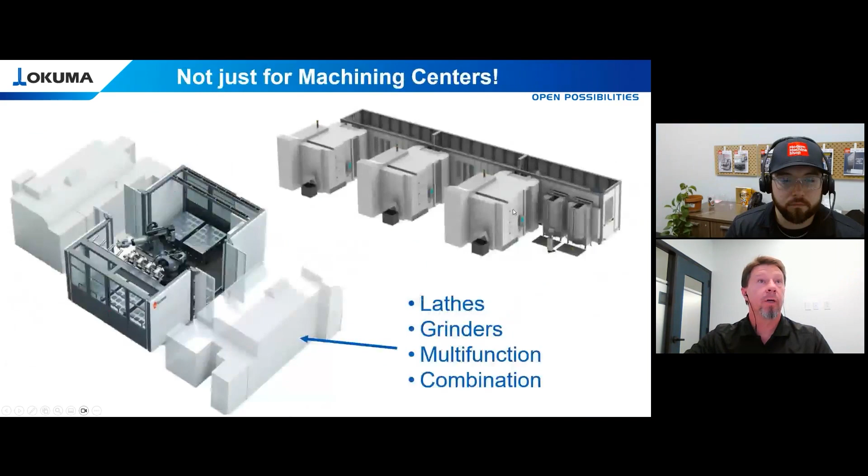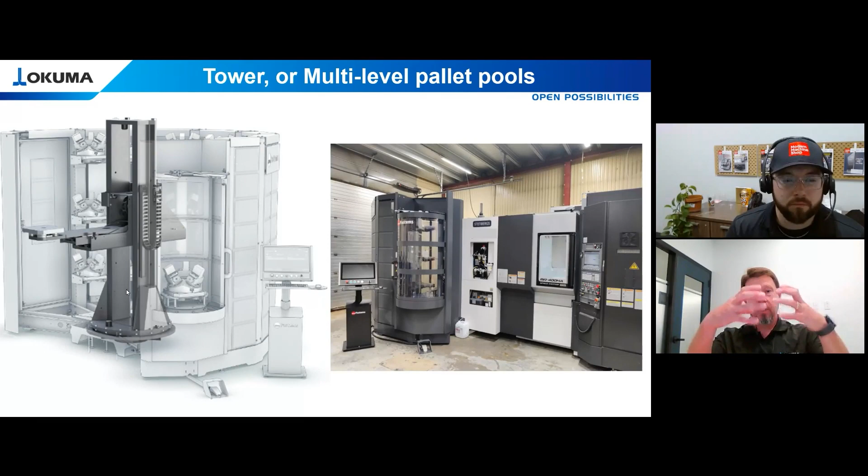If you look at the Fastems pallet pool system, they make this with a linear track that uses this same elevator you see in the center, along with some linear storage. So instead of it being tied to one machine, that elevator runs on a track where you can have multiple machines, and multiple types of machines, a horizontal mill and a 5-axis mill, for example.

Erowa does the same type of scenario, a very similar setup. In this picture, you can see we've got an MU4000 and an Erowa Compact 80. They make a system called ERL, I believe, a very modular system that could be on a track, with multiple rotary racks or multiple shelf racks, linear type racks feeding into it.

So that you can maximize the types of parts that go in, these could be very small parts that fit in the palm of your hand, with a multiple clamping mechanism, or you could move in full-size bigger pallets with a Schunk vise, or things of that nature. I don't know if that's the scenario you were asking about, but that's where my head went when you asked that question.

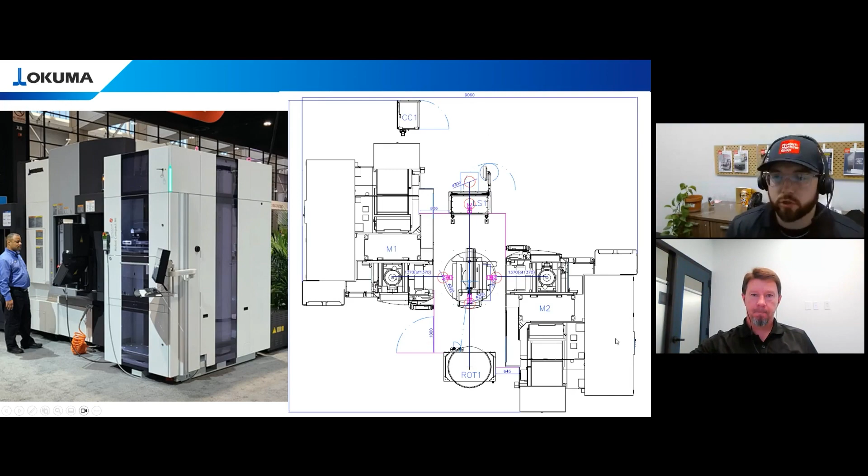I think we've got time for one more question. This one asks: to get started with simple machine load/unload, would you recommend working with a third-party company, or can it be managed with a good CNC programming and manufacturing engineering team?

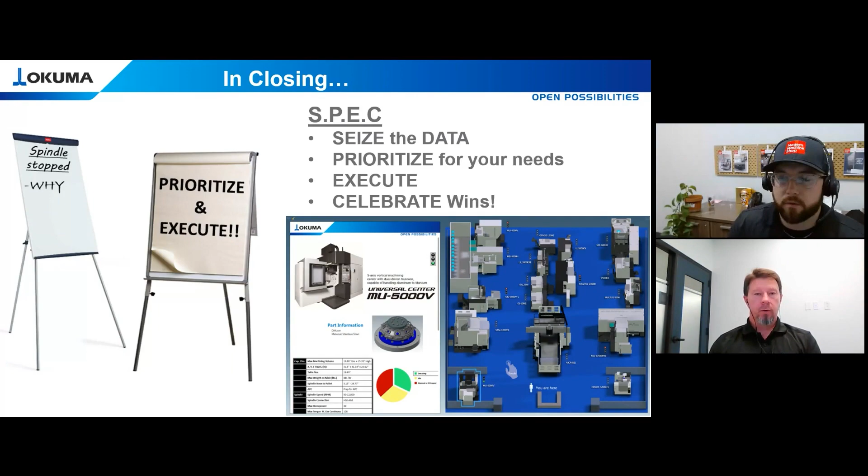If it's simple load/unload of fairly simple parts, that can be done basically through our distributors and our automation groups. So if I go back to our load-and-go type system here, this is something that comes in.

Either us or Geiger sends people in to actually do the install. In general, we'd see a system like this come in and within 4 to 5 days be up and running parts on your production floor.

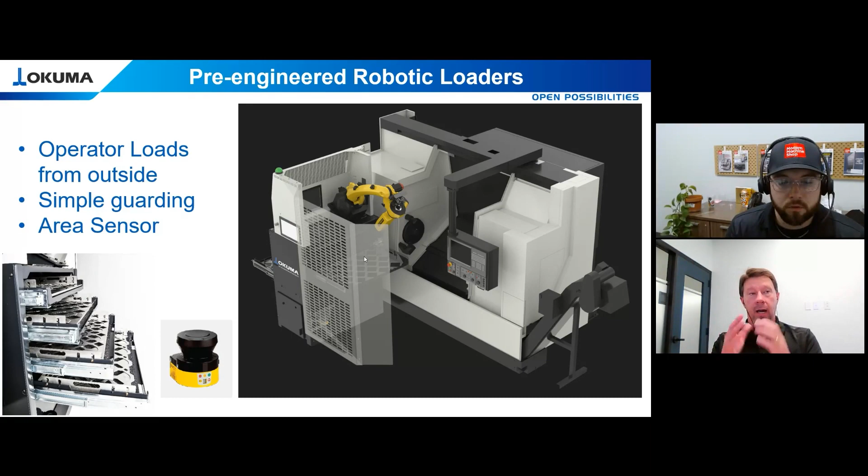Other than the initial install of getting the system in, laid down, and getting the center line of the work holding figured out, your programmers will very easily be able to work their way through this type of software. You'll get some upfront training, and you don't need a robot or an integrator on staff to be able to run a system like this.